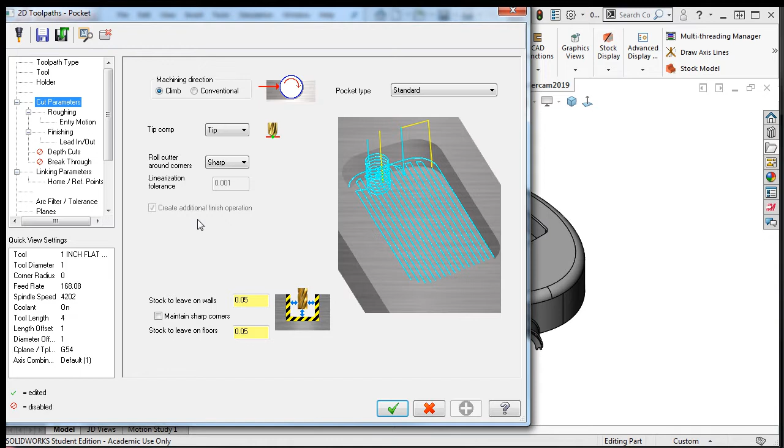In a previous lesson, I touched on the additional finish operation, so at this point, let's take a few minutes to go over it a bit further. I'll select the parameters for the first pocket operation, then the cut parameters, and the create additional finish operation, which is now grayed out, was checked when I first started this toolpath, and it created the second pocket operation here, and will remove the stock left on the walls and floors here.

I'll exit this toolpath and have a look at the second finish pocket operation by selecting its parameters. Here you'll see what Mastercam has done for me. I'll go to the Tool tab, and here you can see that this operation uses the same 1-inch flat end mill as the first roughing operation.

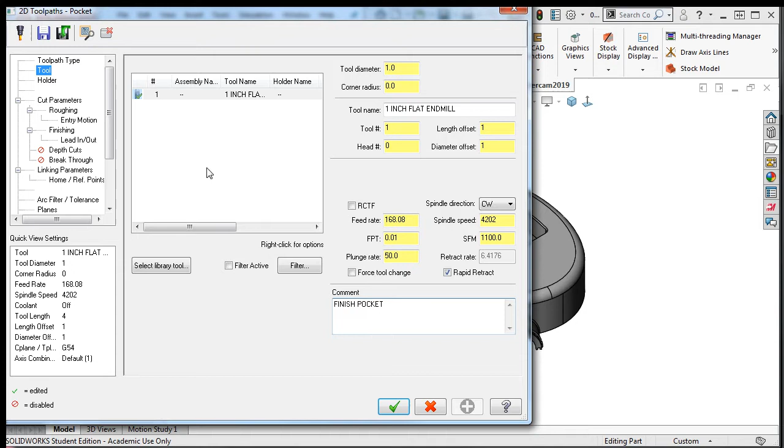If I were only making one of these parts for a friend, this would be fine. But if I were making more than 10, I would add a second 1-inch end mill as the finishing tool. I'll also add the comment, finish pocket. I'll select the cut parameters and remove the stock to leave on walls and floors.

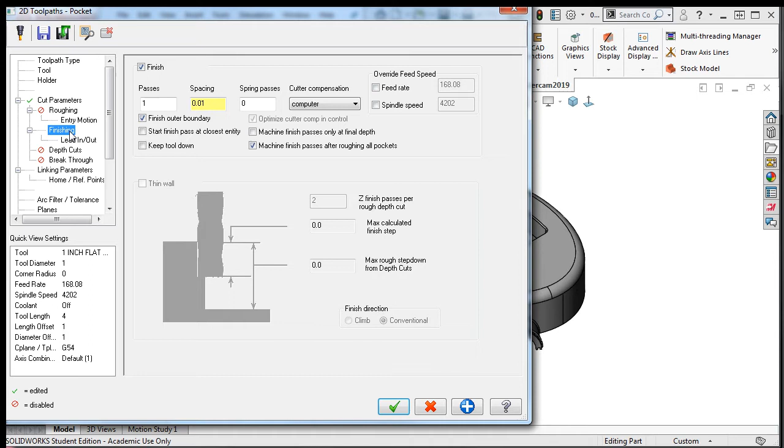Next, I'll select the roughing tab and uncheck this box. Now I'll select the finishing tab and leave it set up to take one pass. Lastly, I'll turn the flood coolant on. And accept these changes. I'll regenerate this toolpath, select both operations, and launch the Verify simulator.

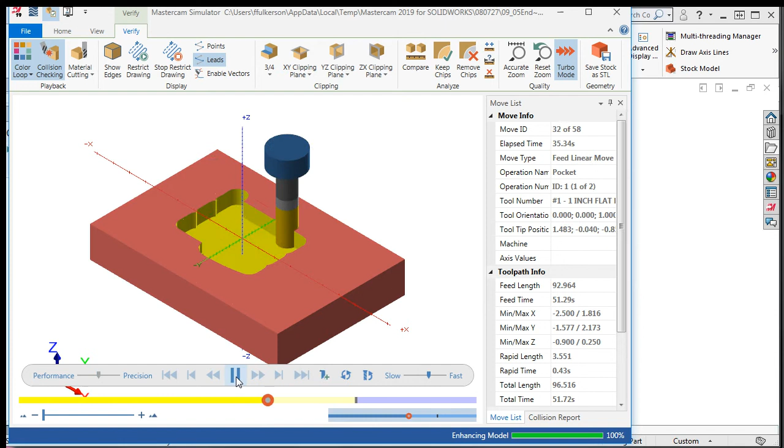In the simulator, I'll turn on the color loop and run the simulation. Notice how all of the bottom surface was not cleaned up. If it were, it would all be blue. I'll go back to Mastercam and open the parameters for this second operation again.

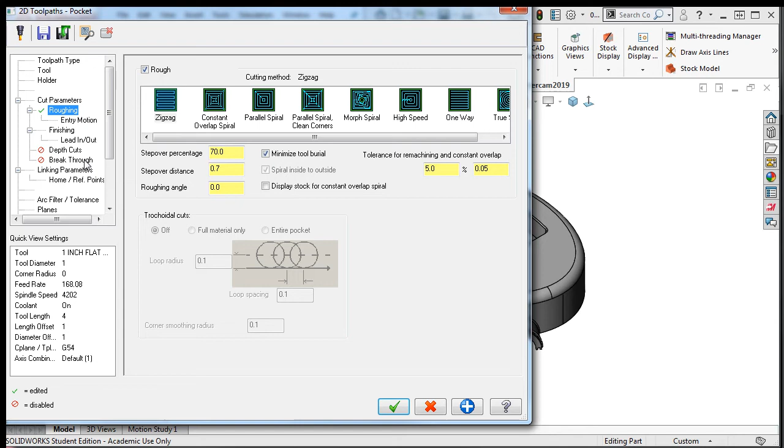To fix this, I'll go back to the roughing tab. I'll enable it. If I had depth cuts turned on, I would want them shut off. I'll accept this selection, regenerate the toolpath, select both operations, and launch the Verify simulator again.

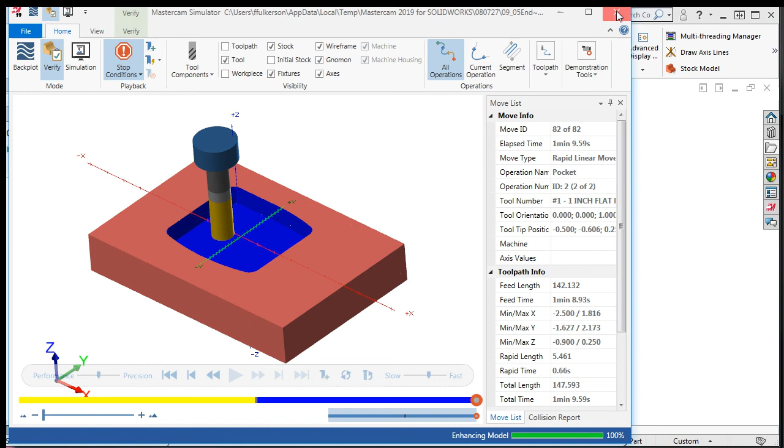I'll play the simulation. And now it can be seen that the bottom does clean up. So I'll exit the simulator and I'll save my work. Next, I'll demonstrate the remachining pocket toolpath, which will be used to clean up these areas in the corners of the pocket that the 1-inch end mill could not properly cut.